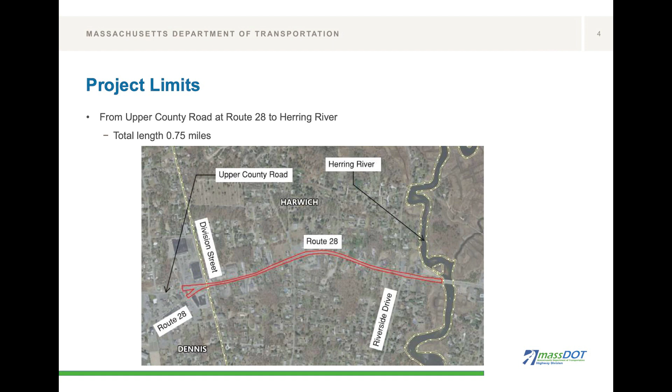So the project is connecting into the recent reconstruction of Route 28 in Dennis, which was phase one of the town of Dennis's plan to reconstruct Route 28. That's on the west end at the intersection of Upper County and Route 28, and it extends about 3/4 of a mile to the east to the Herring River Bridge. It's not touching anything on the bridge itself. We'll be maintaining the existing roadway width at that point and just paving up to the limit of the bridge joint. So no bridge work involved, just roadway work there.

A little bit on the timeline. Going back to March of 2015, the town of Harwich first considered this project and the potential for it to be a MassDOT and FHWA funded project. In September of that year, town of Dennis representatives attended a site walk with Harwich, Cape Cod Commission, and MassDOT officials and expressed their interest in a joint application for potential project funding. So at that point, we knew we had two towns as proponents, and we would work into Dennis to connect in with that recent work there that just got built.

Then in May of 2016, the town submitted project need forms to MassDOT that outlined the initial scope of the project at the time, without any survey to go on, just ideas of improvements that can be made to match MassDOT directives and policy initiatives. In April of 2017, the MassDOT Project Review Committee accepted the project and stated that it was eligible for funding. At that point, it became possible to place it on the Cape Cod Commission's regional funding plan for all Cape municipal projects funding. In October 2019, I believe we had that in place between 2017 and 2019. And in 2019, we completed the 25% plans, design and right-of-way plans.

So what do we want to do? As I mentioned a moment ago, the town of Dennis recently completed that project on Route 28, and this project is essentially an extension of that to the east. So we're talking about a pretty major regional connected improvement project now, going a mile or so west along Route 28 into Dennis.

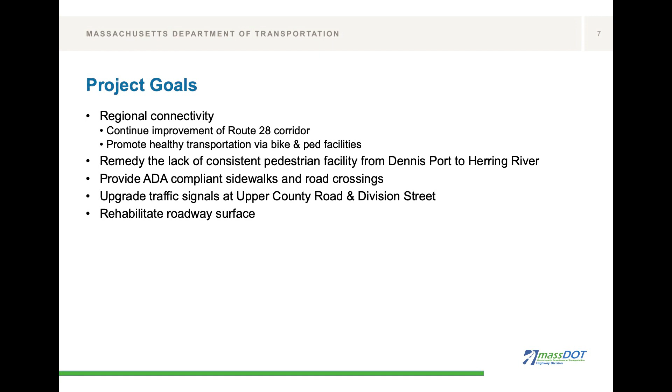We're going to have about 1.75 miles of improved roadway when this is all said and done. Overall, the goals are to improve and promote healthy transportation, so in addition to cars, bikes, pedestrians, and transit. We want to fix the lack of a consistent pedestrian facility throughout the corridor, going all the way from Dennis Port on the west end to the Herring River side on the east. Along with that will be ADA compliant sidewalks, pedestrian curb ramps, and road crossings. A really major component is to upgrade the traffic signal at Upper County and Division Street, and then we will rehabilitate the roadway surface itself and widen the roadway to provide more space for bikers.

Just going to run through a few existing condition photos out there today to kind of illustrate the goals and the need of the project. This is taken looking east, I believe, toward the center of the project near the area of the church. There's a lack of a consistent sidewalk here. You can see the bare outline of a sidewalk under the leaves off the grass shoulder there. It goes in and out, it's not always there, and when it is there, it's a little bit overgrown. So we'll improve on that.

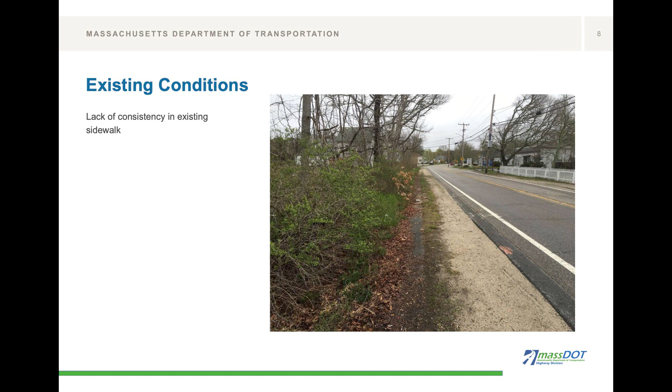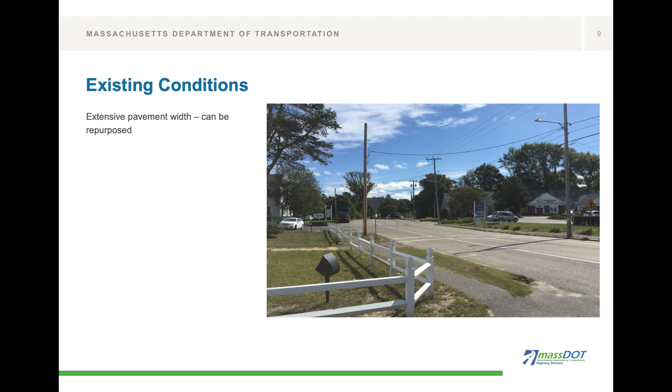Right in the middle of the project corridor, there's some extensive pavement width that can be repurposed. We don't need all this pavement. It can be rededicated to green areas between the road and the sidewalk and landscaping to kind of help beautify that area.

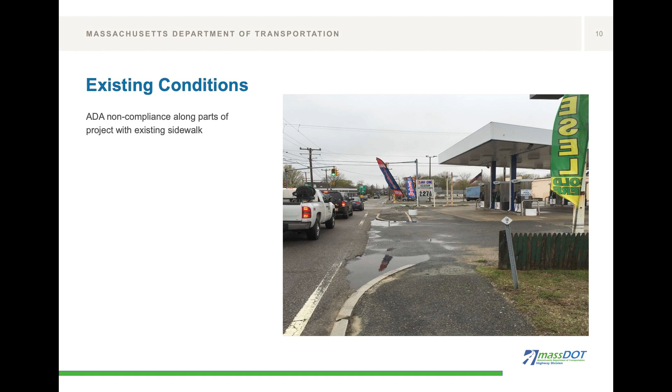Sir, could I ask you to please speak a little bit more slowly?

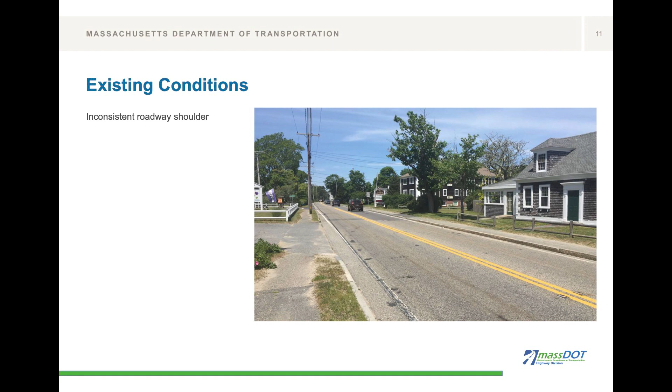This photo is taken on the east end of the project, looking west. This is another illustration of the existing road width. There's an inconsistent shoulder out there currently. It appears about a 2 or 3 foot shoulder on the foreground of the photo. On the other side of the street it might be about a foot or less.

And then another photo just illustrating again the shoulders and the lack of pedestrian facilities.

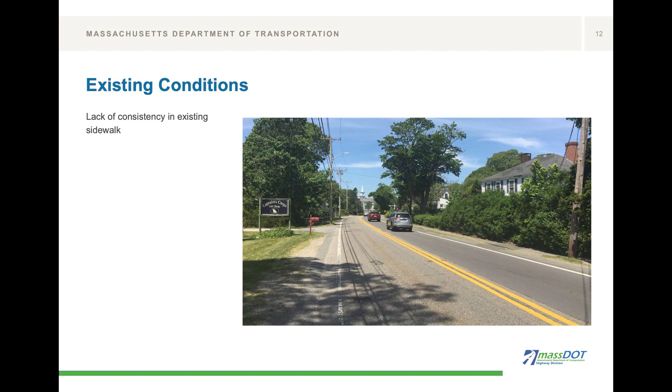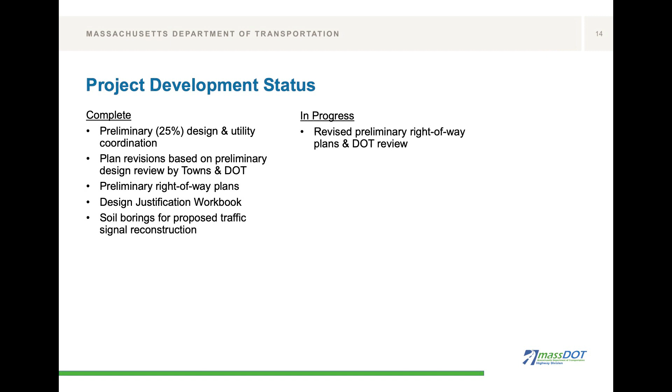So where are we now? As I mentioned, we've completed the 25% design, right-of-way, and utility coordination. We've done some plan revisions based on the preliminary design review that MassDOT performs. We've performed an update to the preliminary right-of-way plans, which is actually ongoing, so that's more in progress right now than anything. We've completed the design justification workbook, which is a standard MassDOT template that details how the proposed improvements are complying or not with their standards. And we've done the soil borings for the proposed traffic signal, so that soil information is in hand and has been taken into account.

This is a long list, but all the improvements are important. There's going to be a new 5-foot wide brick and asphalt sidewalk. There'll be updated cement concrete pedestrian curb ramps. The reconstructed roadway will be 11-foot travel lanes and 5-foot shoulders in each direction. There'll be a new edge treatment for the whole width of the project, primarily consisting of granite curb and Cape Cod berm, a 1-foot wide asphalt berm. The reconstructed signal I mentioned at Upper County and Division Street.

There's going to be some relocations of current crosswalks that are out there today, and some crosswalk additions at the signal. There's going to be sidewalk level lighting added, an extension of what was done in the Dennis Ward projects, extending up to Silver Street. There'll be some landscaping elements and street trees that can be planted in some of these areas, and some signage updates for consistent signage along the roadway.

And then there's going to be a pretty major utility component to this, which has just recently come into play. The town of Harwich is advancing a sewer and water reconstruction along the corridor, and MassDOT recently agreed to take on that work as part of this contract as a non-participating cost. So the state and federal government won't fund the specific installation of the sewer and water line, but they'll allow it to be part of this bid. So there will be one bid, one contract for all the work, which will reflect a pretty substantial cost savings for the town. The town also won't have to pay for the repaving of the road - it'll just be done once. So that'll be a significant savings there.

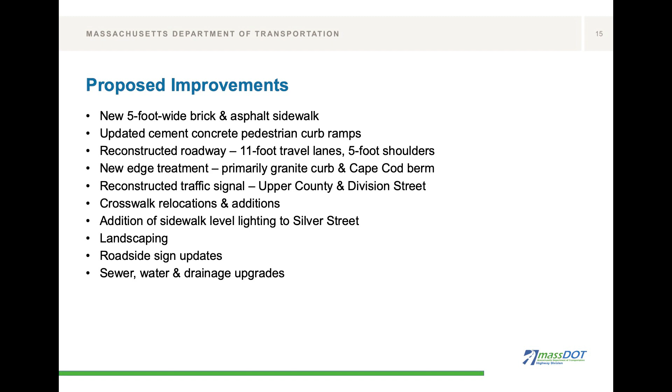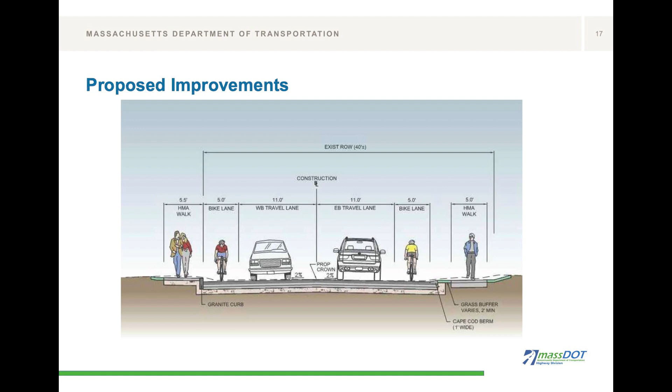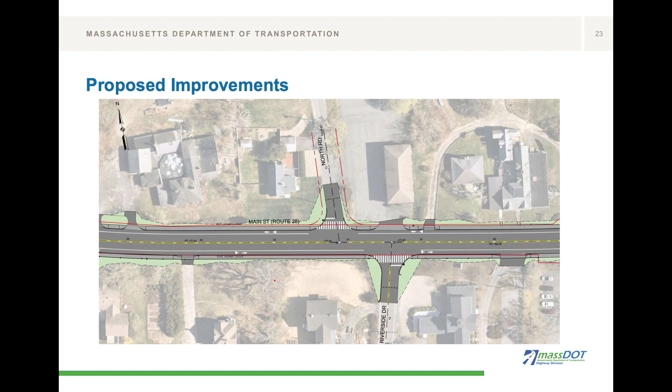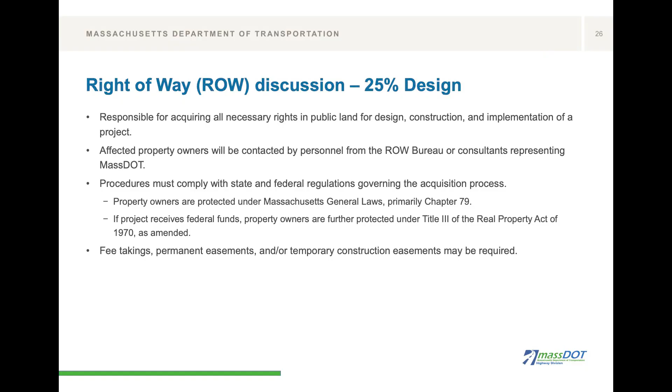For permitting needs, we're planning on a notice of intent filing with the Conservation Commission for the work within the resource area at the Herring River. We don't have any direct impacts to the river, so that's a good thing, and we anticipate we'll be able to have a successful NOI filing locally.

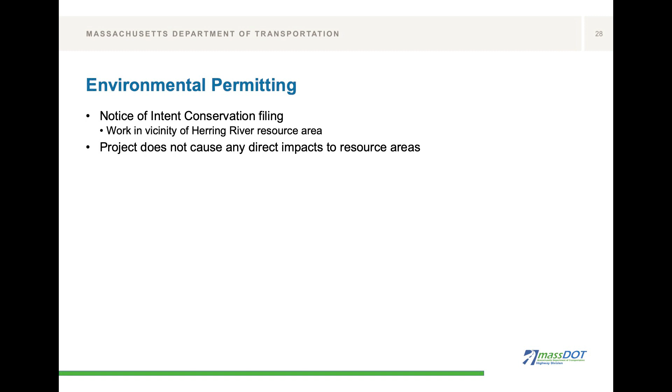For traffic impacts, any work done by the contractor will follow the manual on uniform traffic control devices - typical setups involving the standard menu of items: drums, cones, signage, police details. And then there's, of course, the summer work moratorium, so any work impacting traffic will likely be shut down between Memorial Day and Labor Day.

So where do we go from here? Tonight we're going to take your feedback and account for that in the 75% design submittal as best we can. We're going to work on that submission and get it into MassDOT for review at the end of March. Then the project progresses with the 100% design and the final design, which are due respectively in June and October of this year.

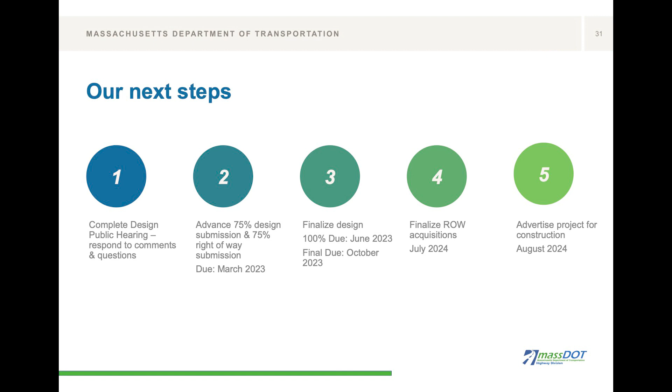At that point, the right-of-way acquisitions become the critical path in the project, and we jump up to July of 2024 to finalize those acquisitions. And then we advertise the project for contractors to bid on in August of 2024.

So in addition to tonight, there's a number of ways you can get in contact with representatives here to give your feedback and ask questions. Comments can be sent into MassDOT via the handout printed at the table where you walked in - you can simply write in and mail your comments that way, or you can email. And then, of course, we're here tonight to hear your concerns and questions.

I'm going to turn it back over to Tom. Great job.

Steve, thanks very much, it's a lot of information to get through, and we appreciate your running us through it. So I just want to reiterate that the whole purpose tonight, from our perspective, is to hear what you think of this and to hear your suggestions and criticisms so that we can incorporate what we can of your comments into the project and end up with a better job. And we will stay here as long as you'd like us to be here. What else did I want to mention?

Steve gave us a set of right-of-way plans for this project last week. I'm going to get another set from him on Friday for the job we were down here talking about last Tuesday. And he's the busiest man in Massachusetts right now. He's designing 4 or 5 projects on the Cape. He's very busy, and he's real good at what he does.

So I just want to reiterate that all this is doing is extending what we did in Dennis into Harwich, the same cross-section. And we're taking a lot of the same enhancements, like the brick sidewalk and the ornamental lighting, into Harwich as well. I think it's going to be a very nice job and improve that corridor, which is so pretty already and very historical. We don't want to detract at all from that. We want to enhance it and make it safer and more pedestrian friendly.

And so with that, I'll be quiet and ask anybody who has a question. Greg has requested, since we struggled last week to hear what people were saying when they commented from their seats, if I could ask you to just come up here to the front, right about in here, so his microphone can pick you up. Just ask us the question and we'll do our best to get you an answer. And again, if you could just spell your last name when you introduce yourself. So, who's got a question? Somebody's got to have some questions. Yes, sir.